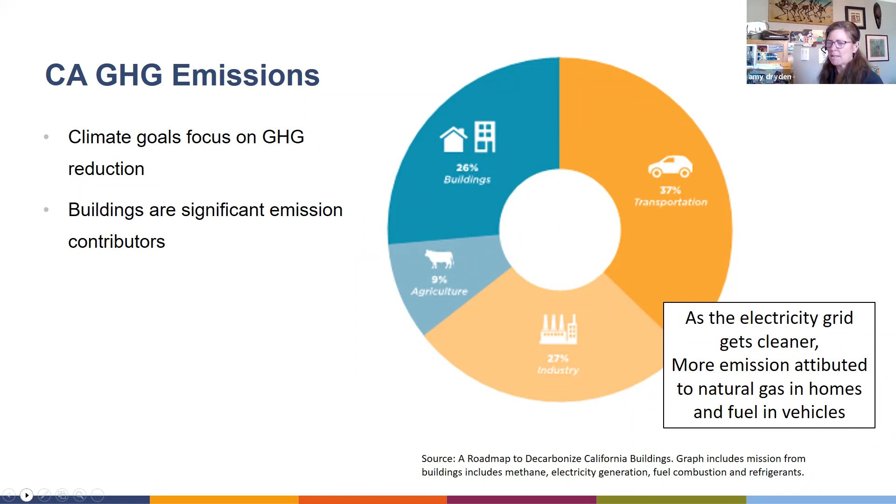I put this up here to set the stage as we look at what percentages come from our buildings, about 26%, and we can see a large percentage from transportation, 37%, and the rest is industry and agriculture. So our buildings are a significant opportunity, and this is what it means for us from a building standpoint.

This side of the donut chart on the left shows that between the dark blue and light blue, 67% of our gas use emissions from residential comes from space heating and water heating. I call that out because when we talk about some of the programs and where the landscape is going, there's a big target towards space conditioning and water heating because it's such a large piece of our donut. I guess because it's not a pie, it's really a donut.

If we look at analysis done by E3, who's been doing incredible work for the past 10 years quantifying the impacts of addressing our building stock, we can see over the course of time, from 2020 to 2050, looking at reductions from mixed fuel versus all electric, which is all in green. This graph accounts for both natural gas combustion emissions and natural gas leakage within the distribution system itself. As we move forward, we get significant reductions in our emissions over time, and we can get 60% emission reductions, based on their analysis, achieved by electrifying our buildings.

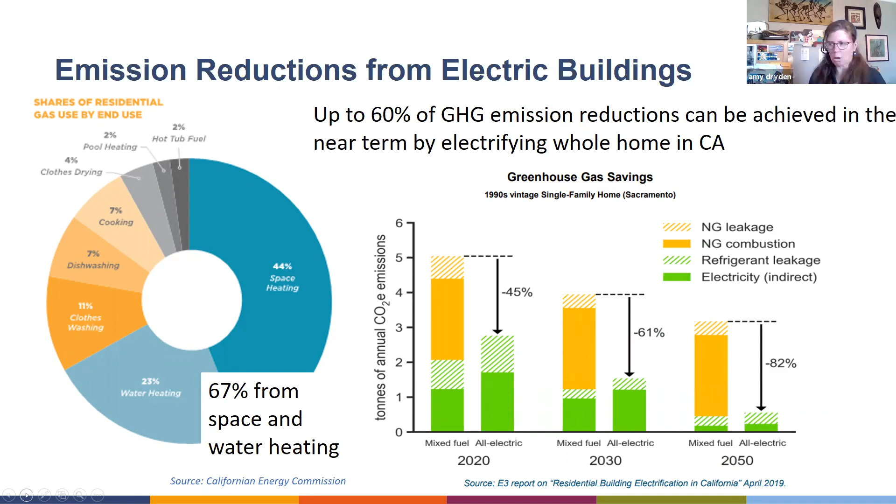That has been supporting this slew of legislation over the past 8 years that has really advanced a lot of this work on the regulatory side.

We've had legislation from SB 32, building off our AB 32 global warming emissions, setting 40% reductions by 2030. We've got clean energy goals by 2045 - it's not too far away - and carbon neutrality. We also have 40% reductions for existing buildings.

The last one isn't a targeted goal, but it's Senate Bill SB 1477, and you may have heard of it - the CPUC is directed to implement 2 statewide programs, one for new construction and one for existing and new, really advancing the market for all-electric or low carbon space conditioning and water heating.

All of this is in response to adding CO2 emissions to our work, rather than just straight energy savings as was approached back when we had our 1978 energy code, and really trying to support demand responsiveness.

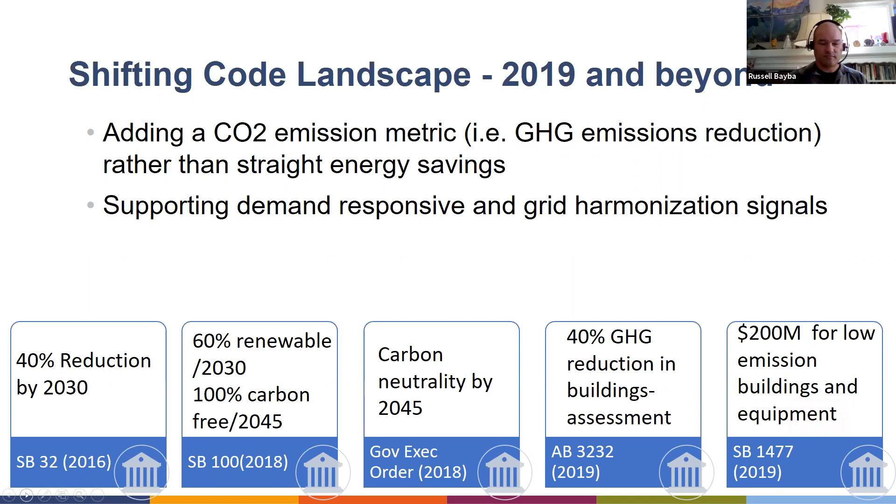This is how it's shaping up in terms of our code cycles: 2013, we had new software; 2016, we added PV; 2019, we'll talk about PV required and storage. Around 2030, we're having clean energy, with carbon neutrality up at 2045. We just got the 45-day language for the 2022 energy code. We're seeing our code start to shift in this direction to really advance energy savings as well as clean energy or emission reductions.

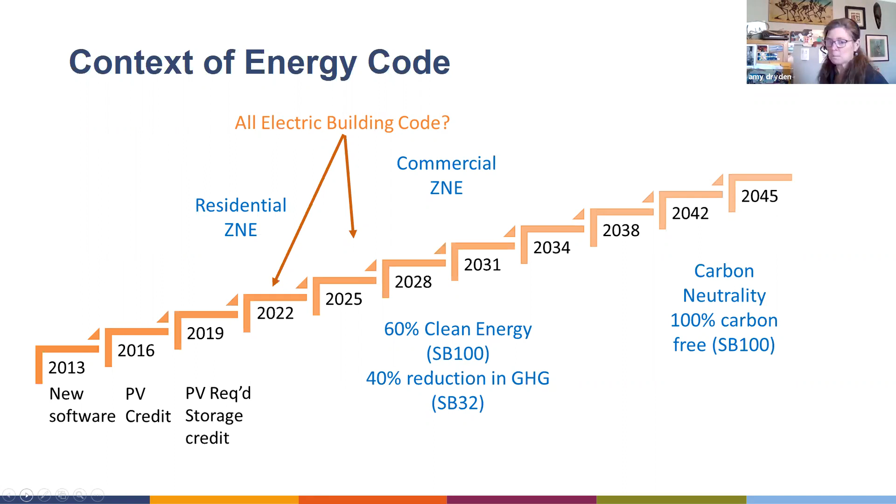So the code is moving in this direction. State policy and regulatory side is also moving in this direction, but so are jurisdictions. We've got 42 jurisdictions across the state who have adopted some kind of REACH code that is preferring electric construction, whether or not it's electric preferred, or all the way to electric all electric required. There are several jurisdictions in the 3C-REN County, from San Luis Obispo to Ojai, and we've got Santa Barbara looking at opportunities. So this is just some context for you of what you may be seeing in your area.

So regulatory side of things and policy is moving in this direction. Jurisdictions are moving in this direction to really achieve their local community goals as well as their climate goals. And then we're also seeing funding to support this. This is definitely a dynamic space, but CCAs, community choice aggregators, municipal utilities, and IOUs all have suites of incentives for heat pump water heaters, central heat pump water heaters, space conditioning, as well as energy efficiency. We still want that loading order of energy efficiency, then electrification, as well as PV and battery. There's existing incentives out there right now, and incentives that will be rolling out over time.

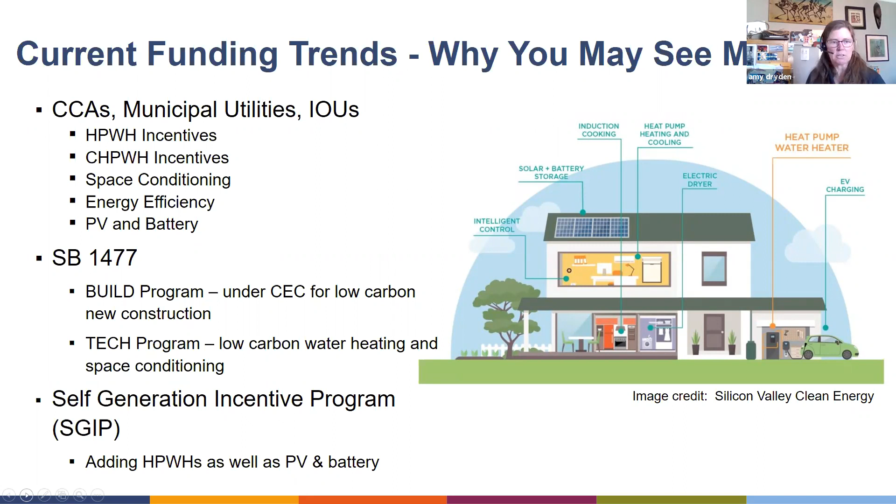So all of this is to support heat pump technologies for all electric buildings. So now I'd like to turn it over to Russell to talk about what are those technologies, what do they look like, what are some considerations for them, and let him take it from here.

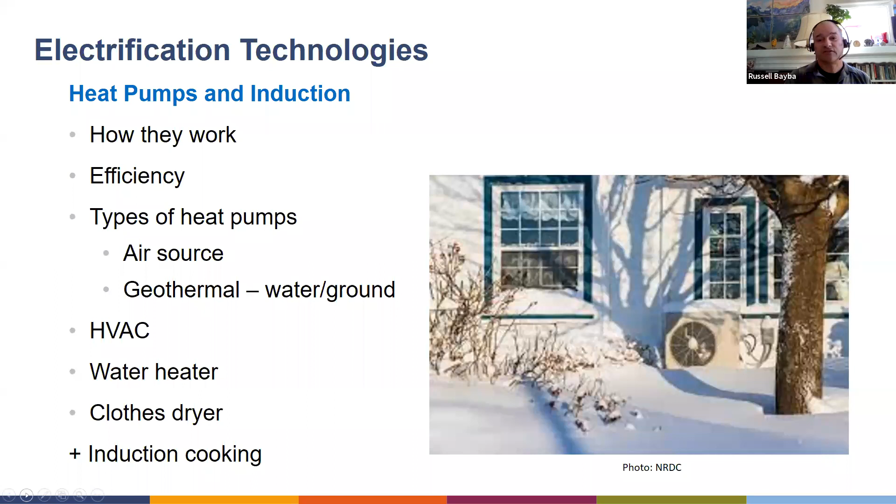So how do they work? Essentially, heat pumps are just moving heat. So in a house, in the summertime, they're moving heat from the inside of the house to outside. And in the winter, they move heat from the outside in. They're just transferring energy between one place and the next, and this happens through a compressor and a refrigerant cycle. I'm not going to go into a whole lot of detail about this, but it's a basic process, and it uses electricity. There's not a whole lot of energy transfer, it's a slow process generally, but it works a little bit longer than gas. Gas has a lot of energy in it, and heat pumps don't have that huge amount of firepower, but they move slowly and very effectively and extremely efficiently.

The other thing is heat pumps are found all over the place, and the big one is in your refrigerator. So they're moving heat out of your refrigerator all day long. They're also in window AC units, they're in normal air conditioners. So they're all around, this is something we've been using quite a lot, and they extract heat in a certain direction, and you can change that direction with this expansion. There's a little valve that goes back and forth, and you can do one or the other, heat or cool.

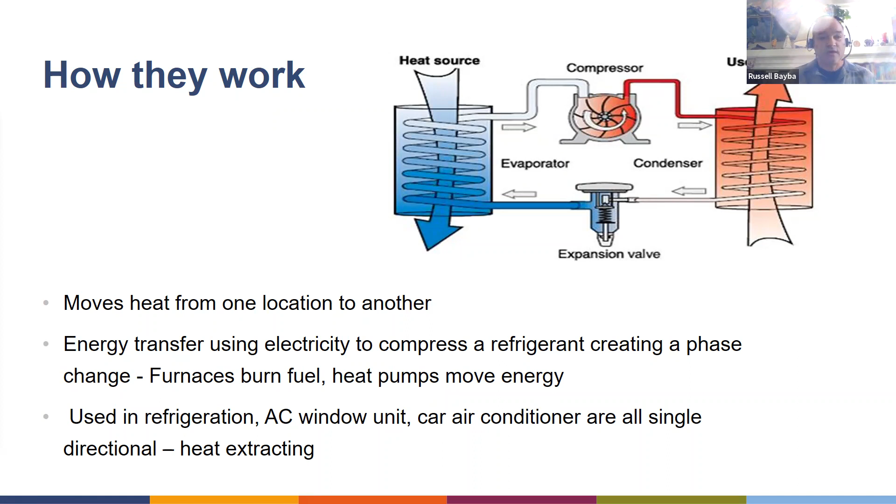Heat pumps work on basically two different ratings. One is SEER, which is for cooling, the other is HSPF, for heating. So you'll get two different numbers when looking at a heat pump, which provides both heating and cooling. Typically it's SEER 14 through 18, but they can go up above SEER 30, which is very impressive. On the HSPF, the heating seasonal performance factor, it's typically about 8 to 10. So when you're looking at products, those are the ranges you'll see.

Certainly as the efficiency goes up, it gets more expensive, but you also get a lot more bang for your buck in those more efficient products. They all generally are variable speed on the higher end products, and that helps with the efficiency.

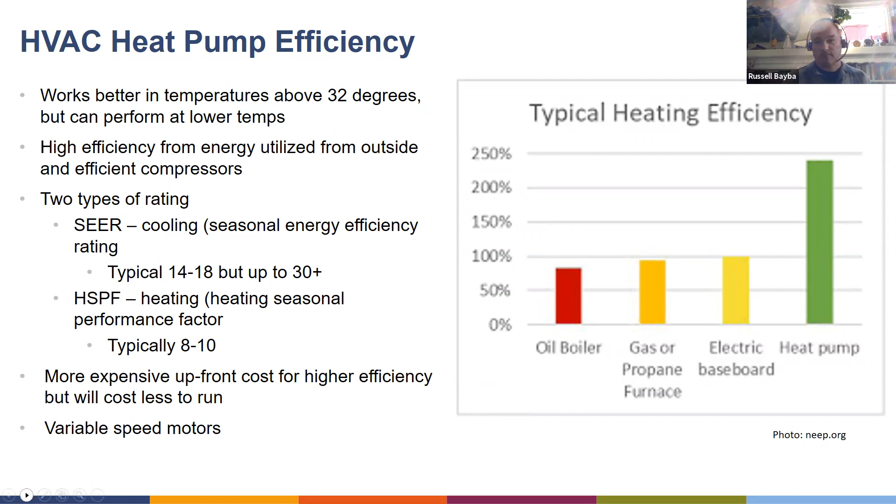In Vermont, they're getting heat pumps that work down below 13 degrees Fahrenheit, which is really impressive. Okay, so there are a few different types of heat pumps.

Generally, what we see in most homes are air-to-air heat pumps. They transfer heat from the air and extract it and put it back into air, essentially. That's what most heat pumps you'll find do. That's what happens in your refrigerator and in your air conditioner as well.

There are some that transfer heat from the air into water, and those would be for water heaters. And there are some for space conditioning as well. There's a product out that produces hot water and cold water, so you can use it for domestic hot water and for space conditioning as well.

And then there's also geothermal. We're not going to go into this much because it's expensive, and there's not a lot of it out here. There's a few more places I think on the East Coast that use it a little bit more.

These are buried pipes in the ground for the ground source, and they transfer heat from the ground, especially in the winter, right into the house, and then dump that hot air in the summertime into the ground. A water source is a similar sort of thing, it moves heat through ponds generally.

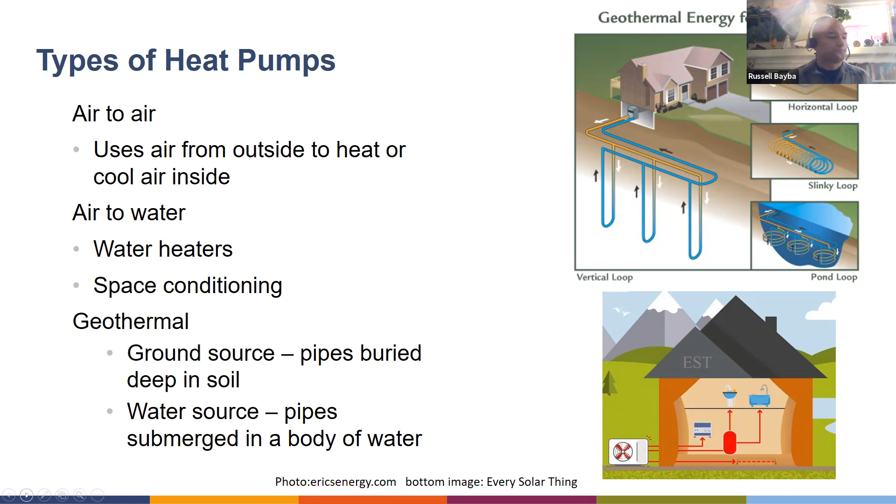So an HVAC heat pump has a refrigerant line. In the winter, it's extracting the heat from outside and dumping it inside. In the summer, it's doing the opposite, extracting the heat from inside the house and pulling it out. It's moving heat from one place to another. It's a very simple process.

There's a refrigerant line that's insulated, copper, connected to the unit, in most cases inside the house or in the attic, and then out to the compressor that's on the outside. As I said, there's a few where they transfer heat from hot water or cold water and pipe it into the house separately, but there's not many of those. Again, this is something that can go down quite cold, and the graphic on top here shows snow on top of that heat pump.

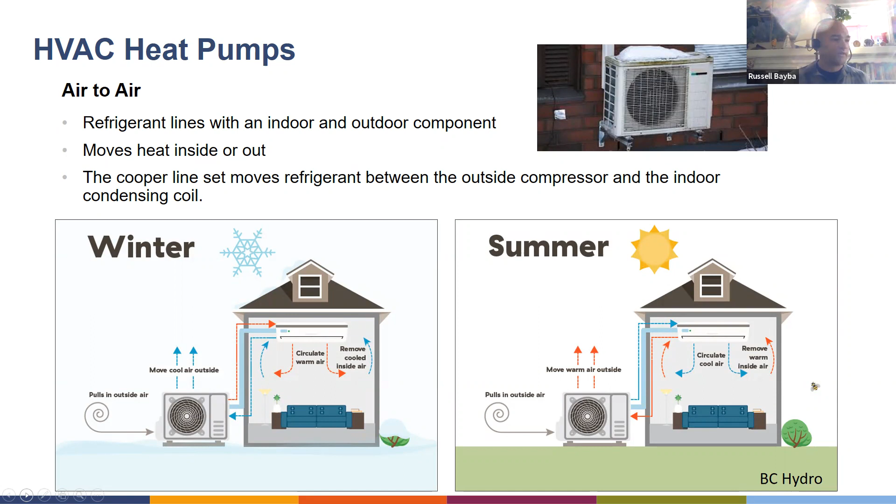Now, one of the next kinds of heat pumps are mini splits. This has become more popular in the last few years in the US. They're very popular throughout the rest of the world, and here we're starting to pick up a little bit more. One of the reasons is they're so efficient, they have much higher SEER ratings than central heat pumps, and they're also very versatile.

They tend to be very small. They can have a single head like the one on the left here, or multi-heads, and a small duct system. I'm not sure how many ducts come off of it, but I think it goes up to 9 heads for some mini splits, so you can do quite a bit with it. It's extremely versatile, pretty easy to install, but they tend to be a little bit costly, more expensive to heat a whole home compared to a central heat pump.

So they have these cassettes, like the one on the left here, bottom. There are different options - you can have heads in different places that allow you to address each room's needs a little more specifically. They also have quite a bit more controls on them than central systems.

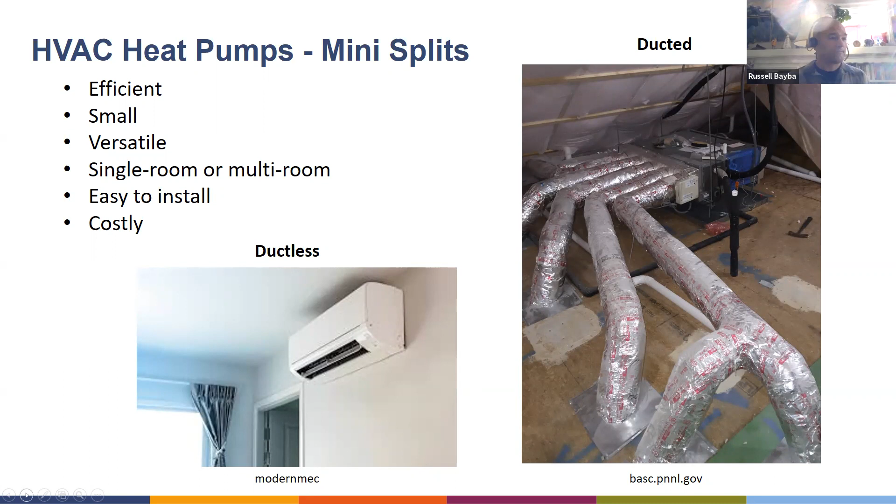So this is the central system, the central heat pump. This is typically what you would see on most homes. It's hard to tell the difference between this and just an air conditioner or a split system.

They're ducted for the whole house generally. They work a little better in larger homes. They have higher capacity. They're integrated with the traditional ducting system. Zoning is a little bit more difficult on these compared to mini splits. And generally, these larger systems are cheaper than mini splits as well.

I think we had a question here. Let's see, when we get to the end of this section, let's go through that. I'll call them out when you're done. Okay, I guess next slide.

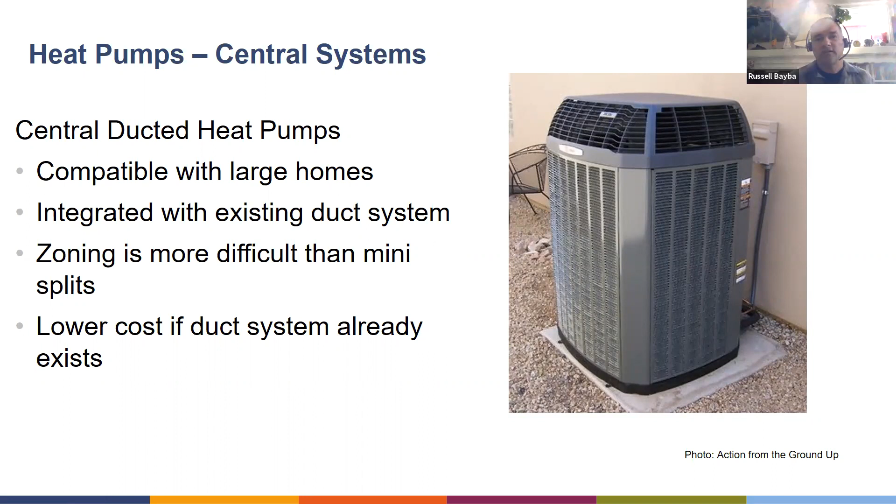Okay, heat pump water heaters. I think one of the advantages of these is they're generally pretty simple. They install very simply, not a lot more complicated than a traditional water heater. They generally sit in the same sort of footprint.

They do have, you're bound by the electrical line that's going to it, but the location could be fairly flexible. They're extremely efficient, certainly a lot more efficient, 3 to 5 times more efficient than a tanked storage gas water heater. Generally, the sealed combustions are a little more efficient, but still these are very efficient.

They're a little bit more expensive, but the price is coming down significantly. And to be more effective, it needs a larger storage tank. It doesn't recover as fast as a gas storage, so you need a little larger tank to accommodate.

Some considerations for these heat pump water heaters is they produce a lot of cold air. So they're great for an overheated garage or that kind of application. It's just a consideration of where you're going to dump that cold air.

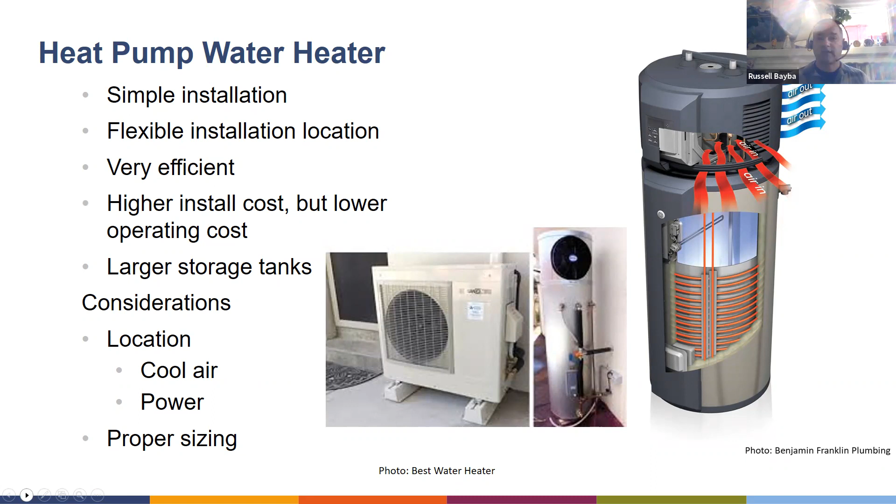Okay, here's another thing that's pretty exciting to me, the heat pump dryers. They're starting to really pick up interest in the States. They work very similarly to, when they're a heat pump.

So they essentially are heating up the air in the drum slightly, and they're circulating and doing this on and off cycle of basically heating a little bit of the air, circulating that around, and then bringing that back and dehumidifying it. So that warm, moist air is hitting the condenser and condensing and pulling that water out of the clothes, essentially, out of the air. And then it's repeating that cycle over and over again.

And it slowly takes the heat out, takes the moisture out of the clothes. It's very delicate, so it doesn't hurt the clothes. It's not having very high temperatures like in a gas dryer or electric. They tend to be longer run times because it takes longer to do that.

And some are actually, you can plug them into the wall with a 120 outlet, which is really nice. They're ventless, the other thing, and you just need a condensate line to drain that moisture out. Okay, next slide.

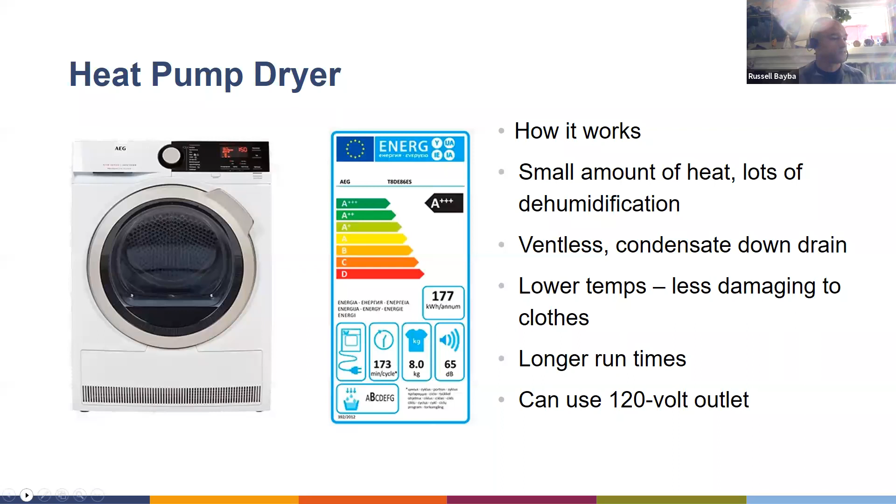And the other really exciting technology that's really starting to, I'm actually really excited about, and Amy and I both have a little stovetop induction cooktop. It's like a single burner to try this out. So induction cooking is super exciting. I think it uses magnetic

electromagnetism as a way to produce heat, and it produces a lot of heat very fast and can release that heat very fast as well. So on the top here, it shows, and I'd never seen this before, but the underside, basically under the glass. And so there's this heat treated glass on the range top, and then I guess these coils underneath it. And it works through magnetism.

So if you have a pot that you can stick a magnet on, it will work on induction, which is an easy way to figure it out. I've gone through my pots and I've figured out which ones are induction ready and which aren't. Some of the advantages to this is they're very fast cook times.

One thing that's rather exciting is how fast it does it. They've compared boiling 6 cups of water on the stove between gas, electric, and induction. Gas will do it in 8.5 minutes. Electric will do it in 5.5, and induction does it in 3. So it's very fast. It also goes up very high, over 600 degrees temperature, and then it also drops to about 100 degrees, and it does that very fast. So it's very responsive. You can dial in the temperature you want.

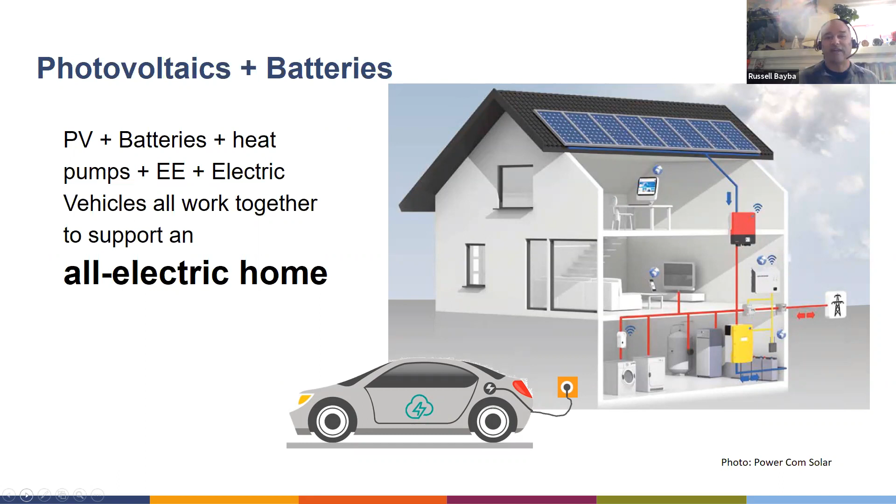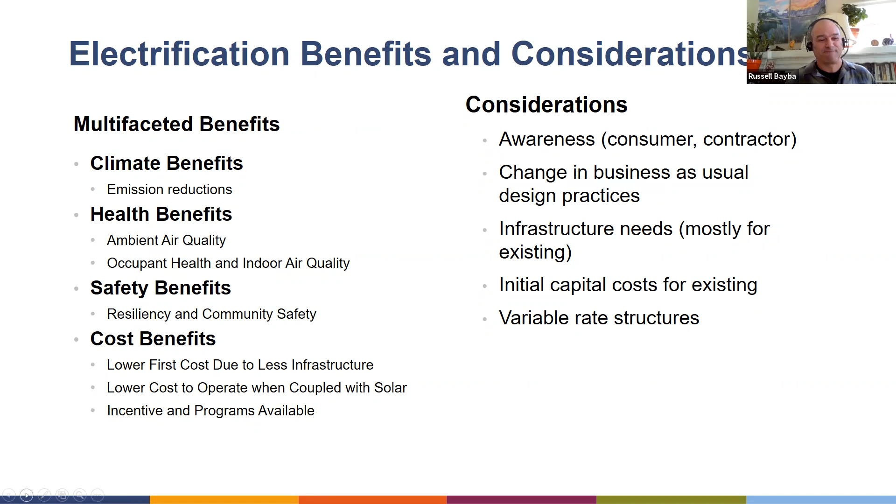Cool. And I bought one also to loan out to people, so I loan it out to friends to try out, because they want to see what it's like, and they're thinking about it, but they just want to experience it. So I have a loaner as well that I use and lend out. Awesome. There you go. You can help convert others, you guys.

All right, let's go on to the code and talk about what's happening there. Okay, so mainly we're going to focus on the energy code, but I'm going to touch on the Cal Green, the green building code, just briefly for a measure you'll see.

Most of you are kind of familiar with this, but I always like to put it up as we're considering what are the measures or conditions that impact the scope of work we're doing in terms of electrification. Again, a narrow slice of the code, only focused on electrification. There are some mandatory measures that have to be hit, both for additions, alterations, or new construction, regardless of what you do.

What you may be seeing is folks taking the prescriptive path, really if they're doing like an HVAC change out or water heater replacement, things like that. You'll see that prescriptive path, with little limited flexibility, really for smaller scopes of work, maybe some small additions.

The performance path, where they're using compliance software to ensure that they are meeting the code, is where 99.9% of our new construction falls, and I would say most larger additions will too.

Then sandwiching that—those show you the minimum code requirements—and in some jurisdictions there are reach codes. So again, we can look at SLO, we can look at Ojai, and some others as these are evolving, that maybe have additional requirements that need to be considered for complying with local requirements, local reach codes.

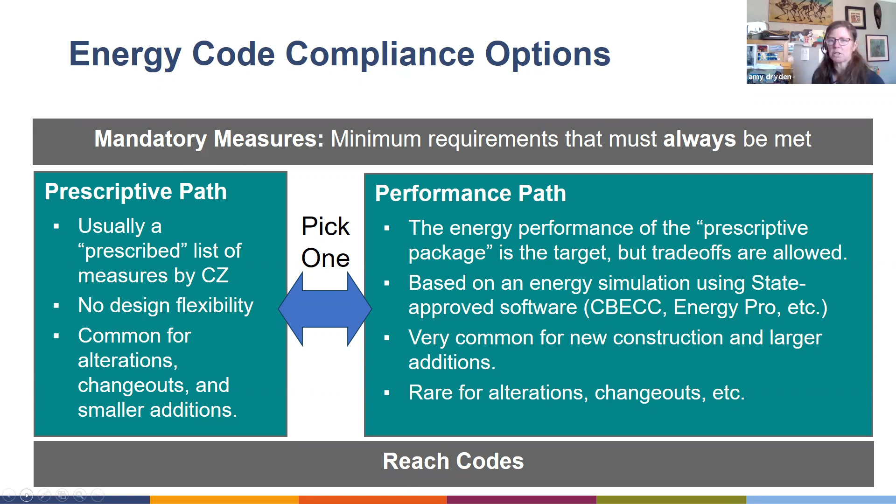I just put this up here to give some sense of it, right? I showed you the 3-year code cycle, and really just to wrap our heads around it, it's addressing changes in standards, practices, and policy. They're always getting increasingly stringent over that period of time.

And as I mentioned, we're looking at this shift of not just straight energy savings, but emissions, and how do we really look at those reductions? I will say, that said, while we are looking at cleaner energy and trying to ensure that we have electric end uses that can be supplied by clean energy, the code is still looking at efficiency first. We're still maintaining that loading order to ensure that our homes are built as efficient as possible to reduce any of those overall loads. And that comes in a couple of different places.

We're not going to go into all of these, but I can show you on the next slide—I've got a couple here, like envelope measures, QII, indoor air quality measures. So the code's looking at that efficiency, right? Increased performance, more efficient mechanical systems, more compact distribution of hot water systems, to reduce any kind of structural waste.

So we have that efficiency, and then the code is adding on to it requirements for PV for low-rise residential. In our 2019 code, batteries are encouraged. For the first time, you can actually get compliance credit for battery storage or battery installation. And there's some requirements for that in terms of minimum capacity, as well as some controls in terms of time of use or basic control operation.

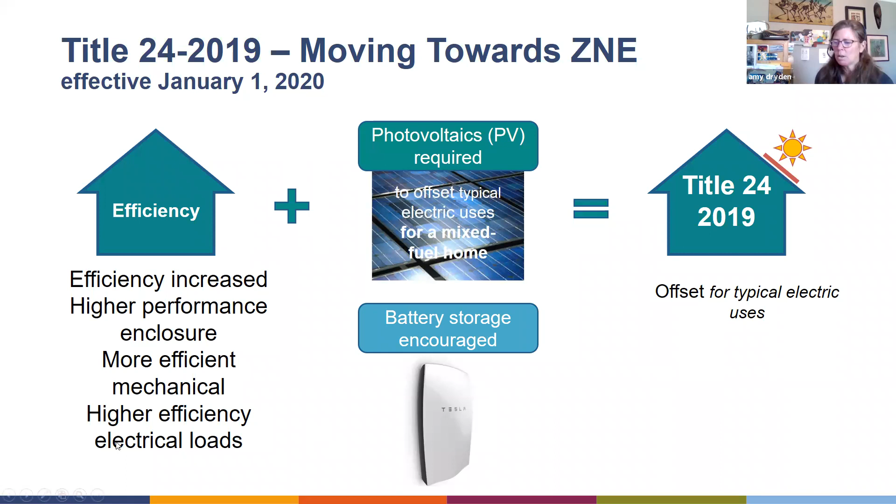And I put this up here just for those of you thinking, what was 2016 and what's 2019, and how are things different? So efficiency is getting more efficient, 7 to 30%, depending on what your building type is and configuration, climate zone, etc., but getting more efficient.

2016, we had nothing to really support building electrification. It was really challenging to get an all-electric home to comply, even though the heat pump technology is significantly more efficient. Like Russell was saying, a condensing gas water heater example is like 98% efficient, 0.98. If we look at heat pump water heaters, that example, they're like 3.24, so 300% efficient. Even with that variation, it was still very challenging.

But under 2019, we've got a couple things happening. One is we have an all-electric baseline for an all-electric home, so all-electric gets compared to all-electric. That makes it so much easier. So even if folks are challenged learning about technologies, the regulatory compliance barriers are kind of being removed, which is very, very helpful.

The other is if I install a propane or gas water heater under 2019 code, I must pre-wire for a heat pump water heater. So this is looking to think about how do we minimize capital costs in the future for retrofits, so we don't just lock in emissions today.

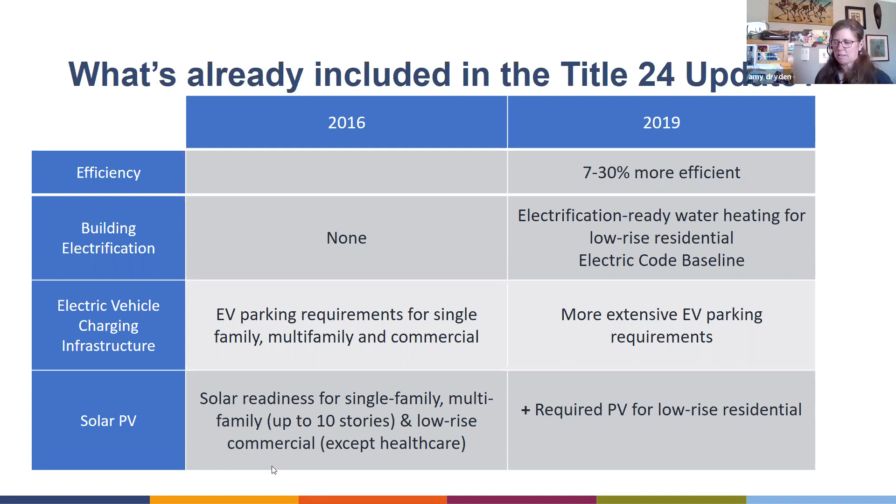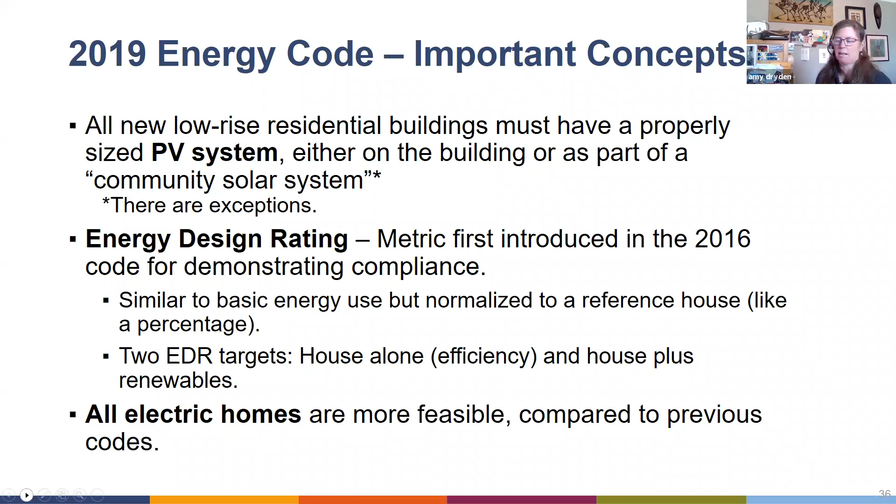So again, covering these concepts, these are just outlining those there. The other piece I'll mention is the energy design rating. Now under 2019 we have two: one for just the efficiency of the home. Again, we're trying to make sure we have efficient homes, and then we layer on the PV and storage onto that. I'm going to touch on each of these in the next 3 slides.

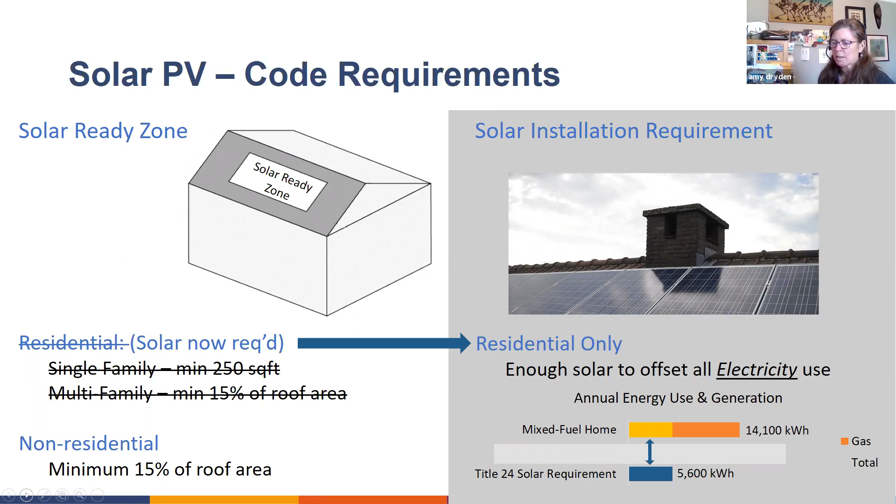So this is just an illustration of that solar zone that was under 2016. And now on the right side, you can see for residential only we've got a requirement for PV. It's really to offset the standard electrical end uses of a mixed fuel building, which is plug loads, lighting, and AC if it's in a cooling zone. So again, it's about a 2.5 kilowatt system. And really, if you're going all-electric, you're probably going to do more PV because it just makes sense, but the code is kind of hitting a minimum line.

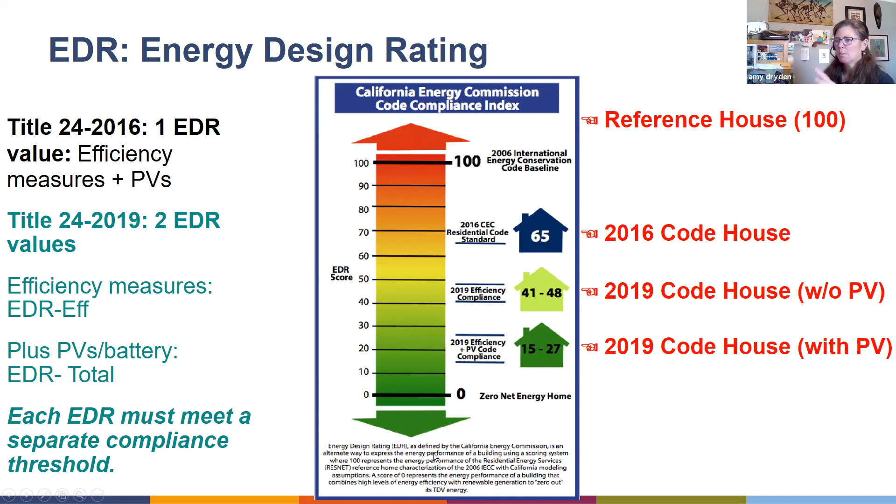And last but not least, this is just calling out the baselines. Again, a really critical component if you're doing energy consulting or architects doing any modeling, where it was very challenging to get things to comply because of the baseline. And now it's equivalent: electric's getting compared to electric, and you'll see much easier pathways for compliance under our 2019 code, which is a huge barrier that's moved out of the way. We are still working on some of this for non-residential and high-rise multifamily. It's still a challenge there; the baseline is still mixed fuel.

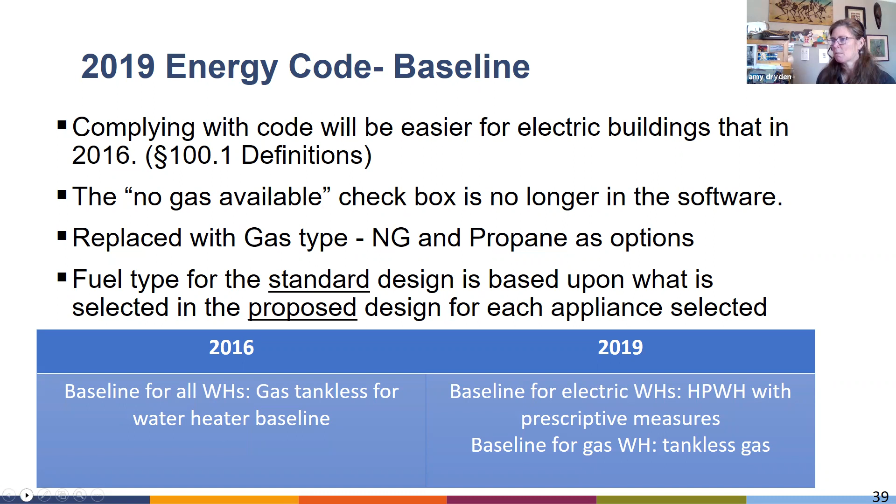Okay, I'm not going to go into this, I put all this detail because you will see the slides after you complete it. But just to call out that I mentioned, this is a mandatory measure for new construction: all homes that install a gas or propane water heater must pre-wire for a future heat pump water heater. It's got to have the 3 conductors, because you want to be able to support 240. It's going to go from the panel to within 3 feet of the water heater, and it can just be a 125 volt, 20 amp receptacle right now, I don't have to activate all 3 conductors, so maybe I'm using it in the time being. This is in addition to other mandates that have been in the code for a while for water heaters, but I want to call this one out specifically.

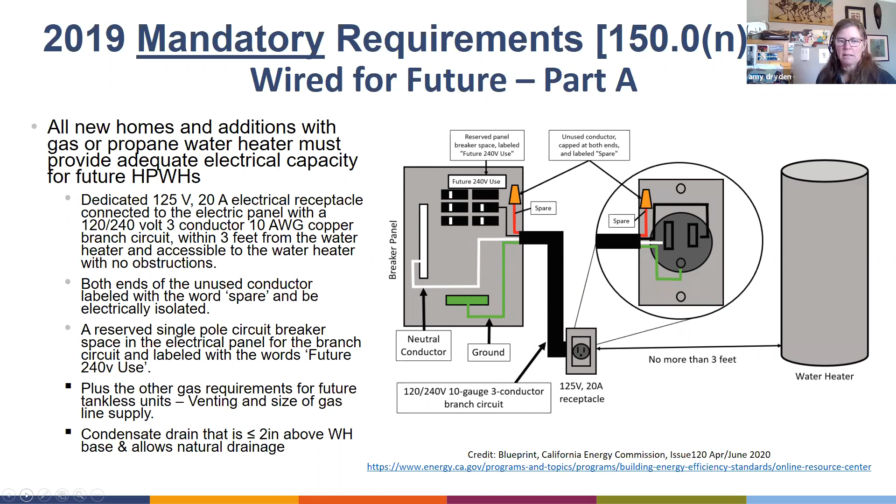In addition, or just as a quick side note, we are seeing heat pump water heaters coming into the market today, due to a lot of work, that are 15 amp 120. We also have 15 amp 240, 30 amp 240. They're getting a variety of products in the market that can fit this.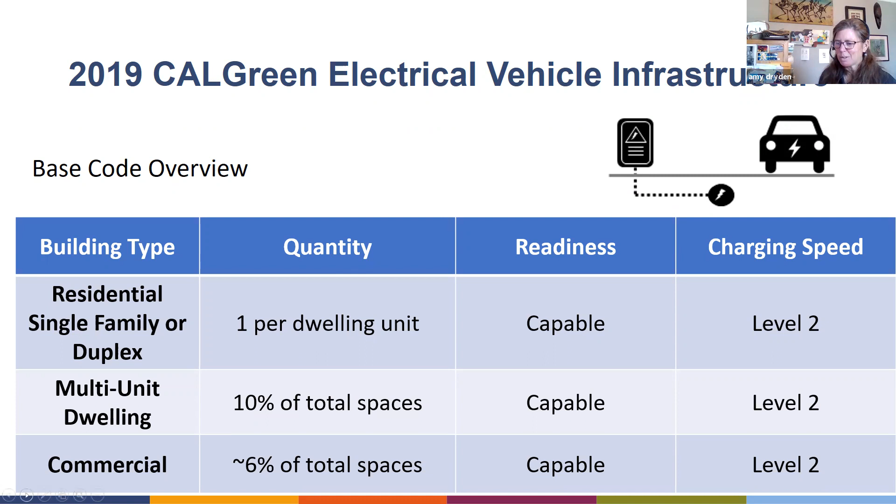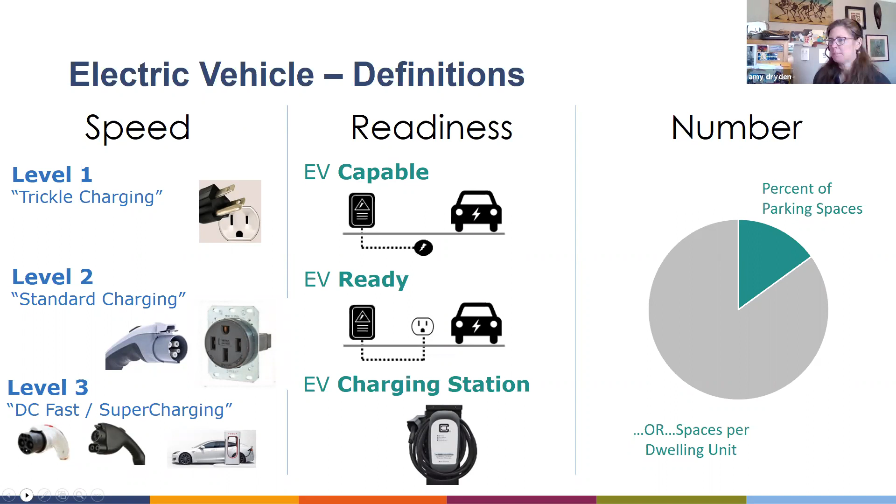Then the readiness, the capable is what's required by code, which just means I have to have the conduit there, I have to have the capacity, but I'm not running wires or conductors. EV ready is I've got the outlet in there, I can actually utilize it. And then EV charging station is the full infrastructure. Again, as you think about it, it's going to be the number of parking spaces.

Okay, so that's kind of like new construction. New construction's got an all electric baseline. It's got some prereqs for mandatory measures for water heating, but what about additions and alterations?

I'm going to go through this. We'll talk about this and we'll talk about some compliance. So alteration, just to clarify, is a change to the home, whether it's the envelope, the lighting, the HVAC. It doesn't add any conditioned floor area or space, right? That would be an addition. And so those are treated differently.

For the alterations, there may be some things that trigger the energy code, like replacing the HVAC, right? So if I'm changing out my wall furnace to a ductless mini split or a ducted mini split, or if I'm changing out my gas storage water heater to a heat pump water heater, those are going to trigger requirements in the energy code. There's other ones for other measures in terms of efficiency that I listed here, but I'm not going into that detail.

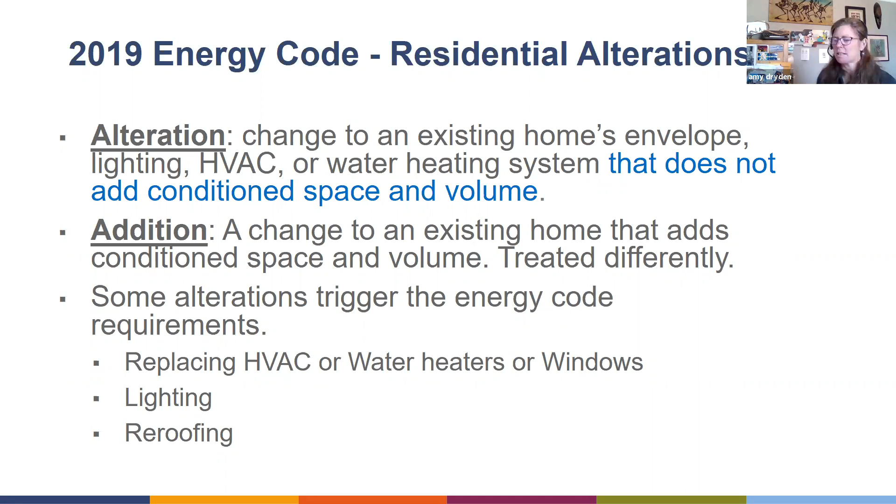So all electric homes and additions can comply even when replacing natural gas appliances. Okay, so you can do that when you're doing an addition, it will still work.

Additions are going to have to comply. They have a different standard in terms of size of addition. They are going to have to comply with efficiency requirements. They may pursue a prescriptive or performance pathway, right, whether I do the compliance modeling like I showed you in that chart earlier. Alterations are going to be prescriptive, right? So again, it's that HVAC requirements for refrigerant charge or duct leakage. Those are kind of the two we're going to be seeing for alterations. And PV, although required in 2019 code for new construction, is not going to apply to additions.

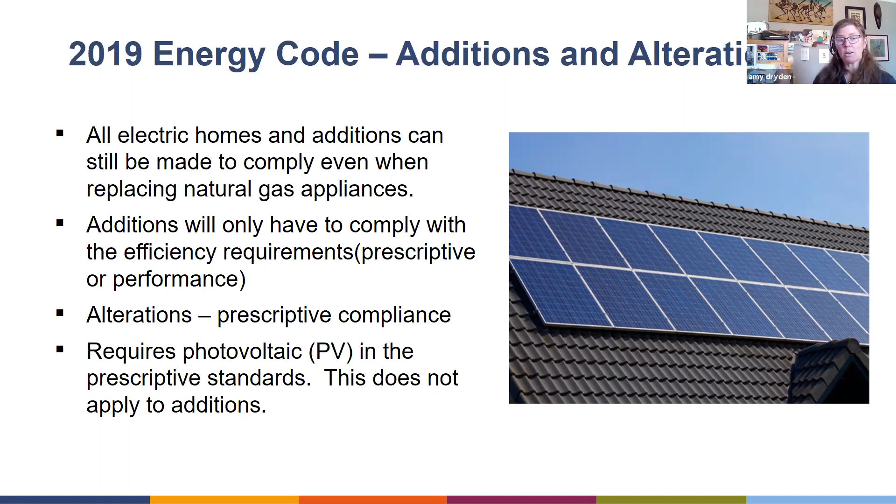So if I think about heat pump water heaters for additions and alterations, here's my short slide that summarizes all those requirements for you. We have this ability. There have been challenges in the past in terms of replacing a gas storage water heater with an electric or heat pump water heater. The code really does not support electric resistance water heaters, but it does support heat pump water heaters, which are electric. So just keep those in mind.

So depending on whether or not I have gas or no gas available at the water heater, I have some different requirements. What I want to call out is the code here, and we've got a whole heat pump water heater class that goes into this in more detail. The code is really focusing on higher performing and incentivizing higher performing heat pump water heaters by referencing the NEEA rated tier 3, the Northwest Energy Efficiency Alliance rating, which looks at evaluating the performance of heat pump water heaters in terms of efficiency, decibel ratings, demand response, etc. If you don't use one of those higher performing ones, you have some other prescriptive measures to balance out that efficiency, whether it's compact distribution or additional PV.

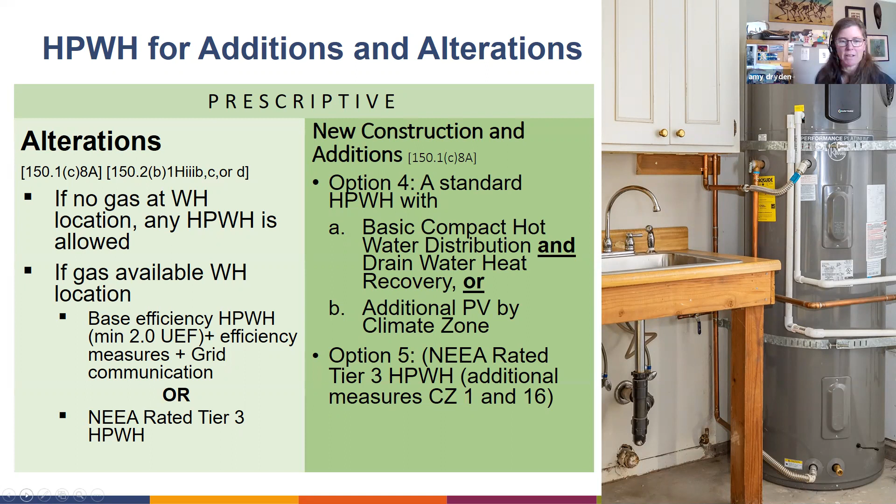So you can see those here, and it's by climate zone. So the short of it, you can just go for a NEEA rated tier 3 water heater, and it's that simple installation.

For HVACs, for alterations and additions, you may be extending an existing system to an addition, or you may be installing a brand new system. It really depends on the scope of work. Allowance for a heat pump is there even if gas or propane is available—you can add a new system, replace an existing system, or extend it. You will have to meet some of these prescriptive requirements.

If I'm replacing enough of my existing system, or installing a new system for that addition or alteration, in terms of duct leakage I'm going to have to meet those standards. It's going to have to be HERS verified and tested to make sure I hit that 6%. I also may be looking at refrigerant verification as well.

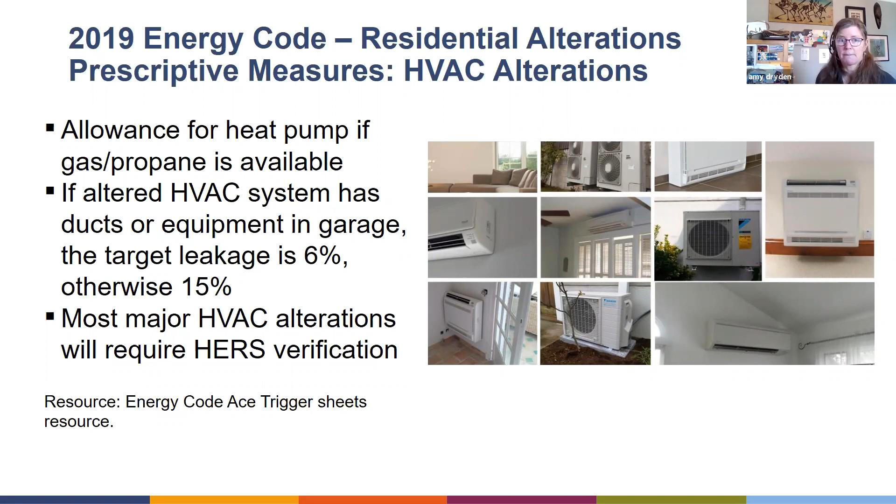So those are the big things I wanted to talk about in terms of what's in the existing energy code, as well as green code, in terms of electrification.

And then briefly, I want to talk about some of the compliance documents. I'm only going to go through this briefly because 3C-REN offers a number of different courses that dig into a whole course solely on alterations or additions, and that compliance documentation, to really make sure you've got it locked down. So this can complement that, or build off of that, where folks can follow on with additional training. But let's just give this overview—hopefully some of this is familiar to you all already.

When we think about the compliance process and what documentation we may be creating as designers, architects, consultants, or what we may be reviewing as plan reviewers, we're thinking about this first section here. I've got this outlined by construction process, from plan review, installation, to third-party final inspection.

And the first one we're going to see is CF1Rs. Those are what is required by code. There's different form numbers depending on if it's new construction, an addition, or alteration—they all start with CF1R with additional pieces after that. You'll see them submitted with the plans and specifications, or at the time of the permit, and they really show what's required to meet code. Please note that a CF1R is not required for an HVAC changeout to get the permit, but it's required to close it.

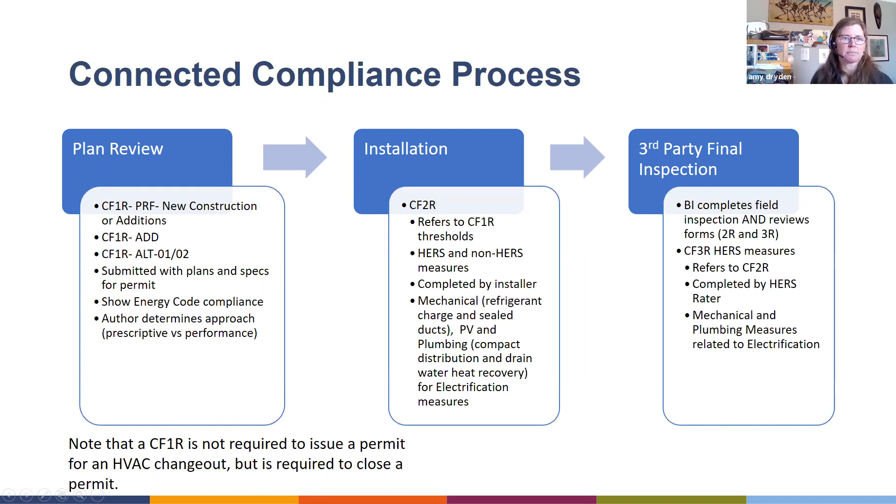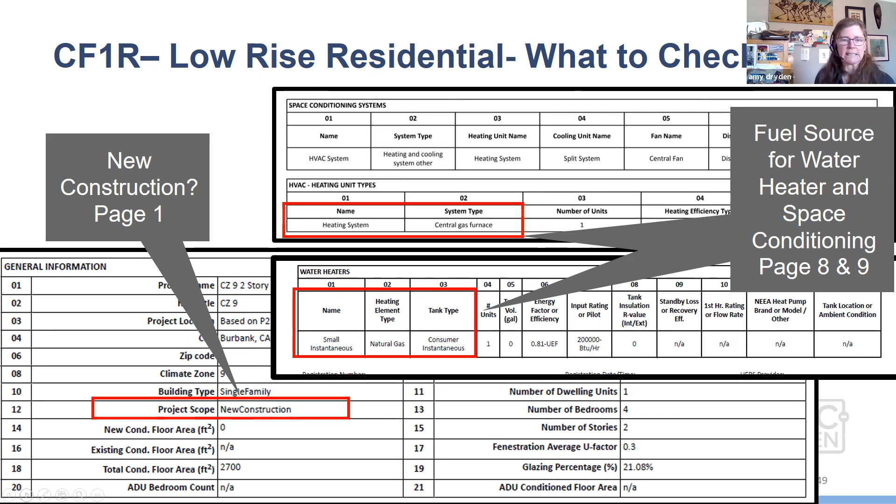Really simple way in terms of new construction and CF1Rs, this information calls out really clearly what you want to be looking for. If we think about what's happening in the field, as building inspectors, there's a lot folks are looking for. So I would just call out a couple of things. One, if it's all electric, you're going to say there's no gas meter there, right? The infrastructure does not exist.

The other thing I will say, well, you've got a lot to look at. There's kind of key components that really affect the efficiency of a home, from insulation to window types, to the type of water heater and where it's located, as well as the HVAC. So those are things to look at to ensure that home is built as intended and those benefits will be realized. Even as an architect, contractor or designer, those may be things you want to double check too at the end of a project, right? Because you have multiple subs and you want to make sure, was it built as I intended? Am I going to see those results?

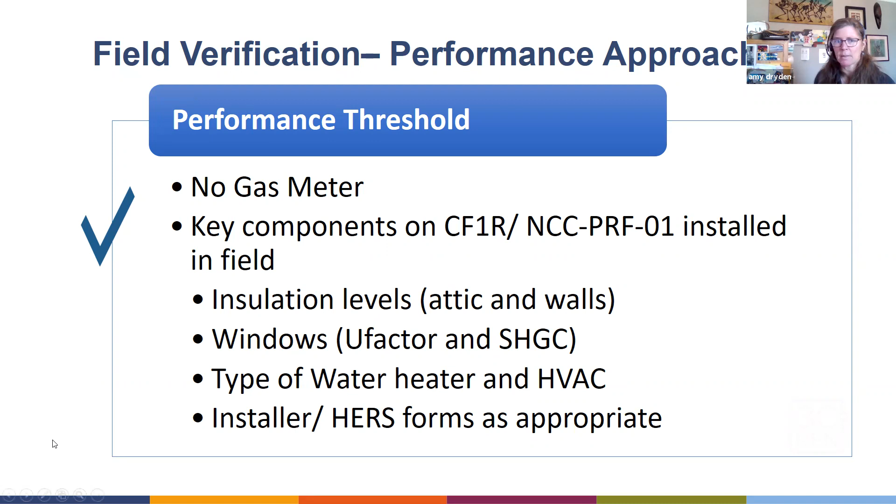So some of these field verifications, while I was thinking about building inspectors, are also really great practices for those of you who are the GC on a project to look at that verification. So the next section we have is just a couple of approach and case studies that we can talk about. But before I go on, do we have any questions?

Yeah, there's one from Ruben. So if you have an all-electric home, can you have a gas meter and a gas line to supply grills and fireplaces and that kind of thing? Yeah, great question. The energy code does not prohibit any of those.

I will say also in REACH codes where jurisdictions adopt them, the energy code is saying we are encouraging all-electric homes, or have an easy pathway for it, right? The REACH codes that jurisdictions are adopting are really saying, oh, we only want all-electric homes, or we're going to favor them. In those REACH codes, many jurisdictions are calling out distinctions between outdoor gas fireplaces or grills or things of that nature, where they'll define it to say no gas infrastructure in the building. So then they're allowing kind of the infrastructure for exterior uses. So we'll see that in the REACH code.

The one thing I will say is I know people really like outdoor gas fireplaces and grills, and it will be time to get there. But what we'll see over time is just the cost. There's still a cost to put in that gas line, and our rate structures are really going to affect the operations of those end uses over time. So that's just a consideration in terms of what people want and what does it take, responding to the market. But I guess the short answer is no, it doesn't prohibit it. Sorry, not good on short answers.

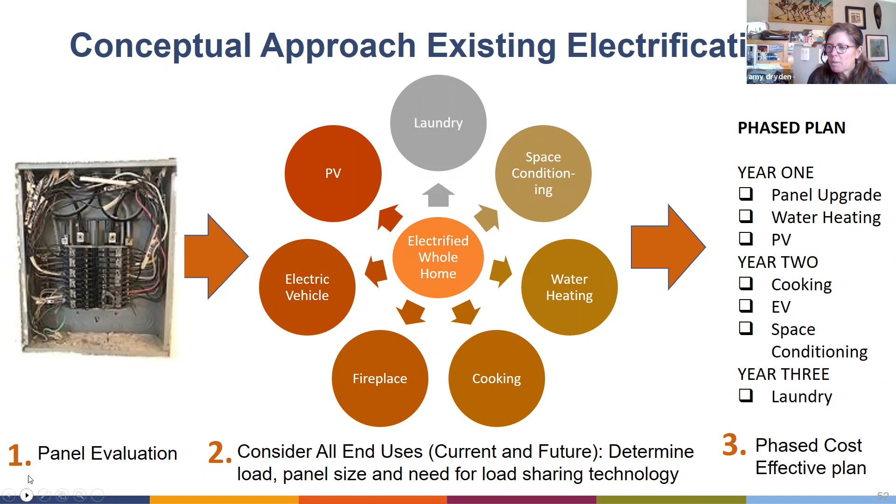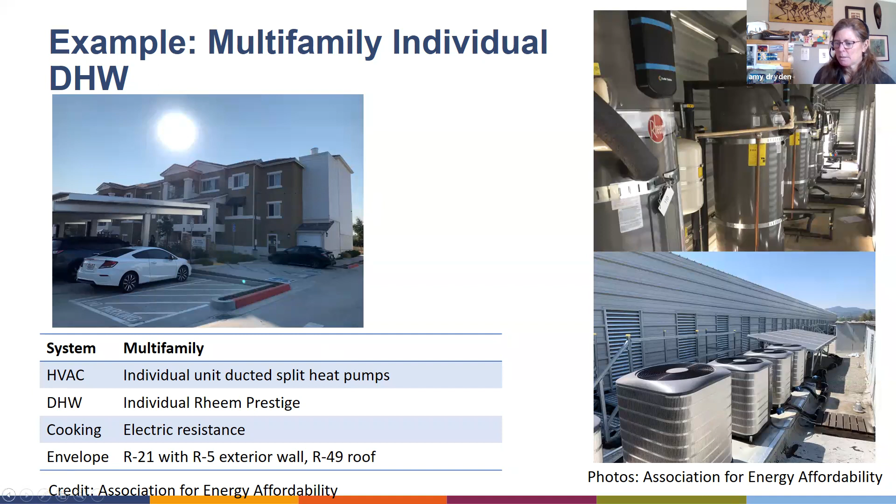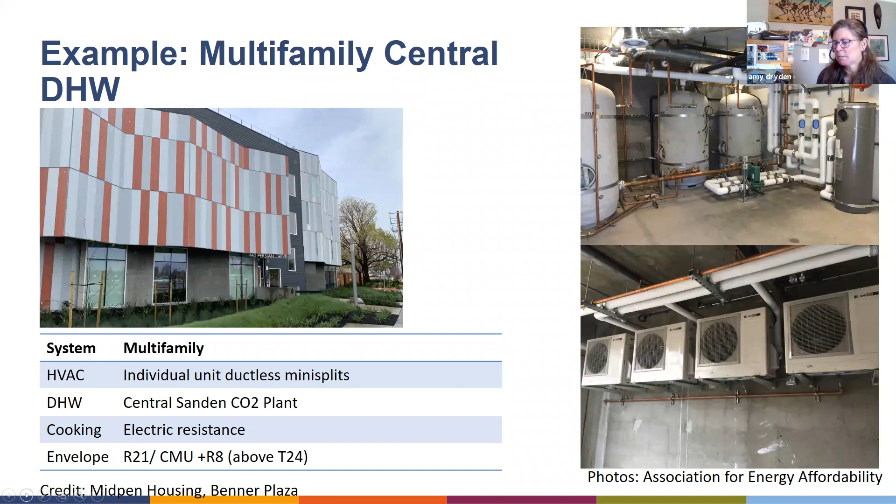My sincere apologies.